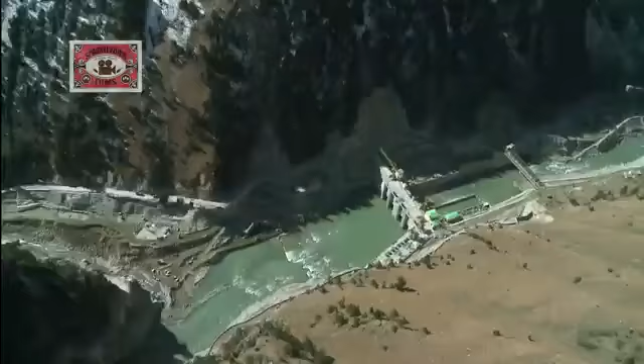There are no half measures in the founder's vision. An approximately $1.5 billion state-of-the-art hydropower project with a capacity to generate 1,000 megawatts. Once completed, it will be the largest hydropower station ever to be constructed by an Indian private company.

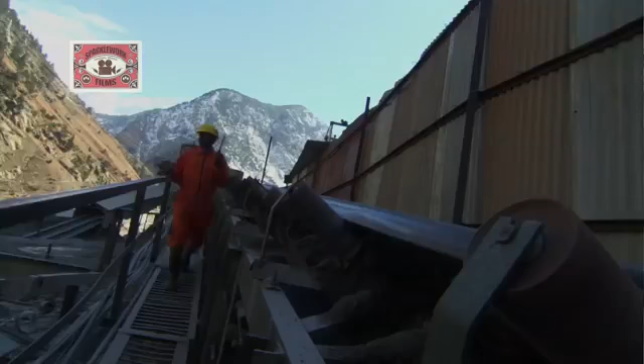When the organization was thinking of implementing the Karcham-Wangtoo project, all of us were determined that let us create an aggressive timeline. So we thought let us keep a time frame of 5 years and then we will work out whether we can better it.

Now, with the clock ticking, it's all about finding the perfect location.

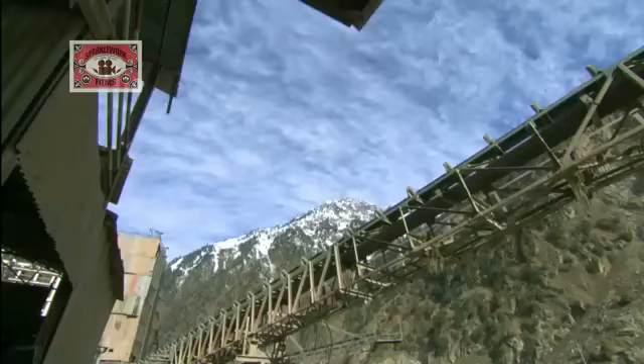At first glance, the tiny hamlets of Karcham and Wangtoo seem an unlikely site to realize an ambitious megastructure vision. Surrounded by jagged peaks, prone to sub-zero winters and accessible only by steep mountain roads.

But when it comes to the science of generating hydropower, this valley is tailor-made. The river Sutlej provides the mass of water. The steep gradient between the proposed dam site and the power plant provides the ideal head.

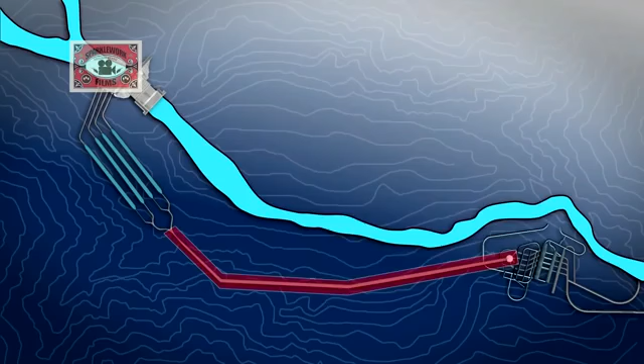The main dam at Karcham will divert a mass of water from the Sutlej into inlet gates. Water will then travel along the nearly 17-kilometer-long head race tunnel, or HRT. From here, it's a steep drop through a height or head into the turbines of Wangtoo's powerhouse.

It is here that the river's kinetic energy will be transformed into electricity. Further onwards, the river Sutlej will flow out through the TRT, or tail race tunnel, back on its original course.

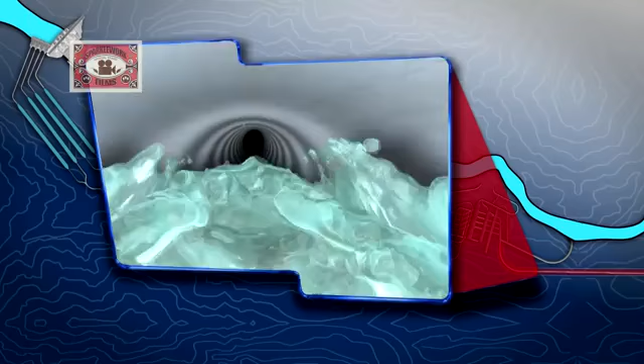With the blueprints in place, it's time to set the works in motion. Strong winds blow across an intimidating landscape, and it's eminently clear setting up this construction site is not for the faint-hearted.

In order to realize this onerous task, the builders commissioned their top commander to set up base camp for the men and the machines needed to build this megastructure. Brigadier Upal brings over 35 years of experience in the Indian Army to the Karcham Wangtoo project. Almost immediately on reaching the site, he knows it's an uphill battle.

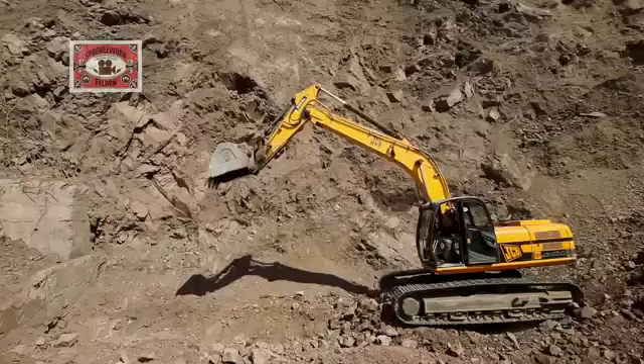In the mountain, it's very rare to find a flat piece of ground. A river flowing and hardly a bank of the river, and the bank was also very low, just running along the riverbed. So to create a camp in a vicinity of this kind, or a terrain of this kind, we had to literally fill up the whole place with a large amount of boulders, stones, rocks, sand to bring up to the height what it is today.

In just over 1 year, the main camp at Sholtu and 7 smaller ones are ready for their occupants, all 14,500 of them.

As the brigadier rallies troops at the high-altitude base camp, in the plains below, other contingents prepare for a treacherous journey.

Besides vital supplies, these trucks will also carry million-dollar equipment as heavy as 50 to 80 tons. All this on some of the most dangerous roads in the mountains.

Keeping steady pace, the trucks ascend to Karcham and Wangtoo. Meanwhile, in the valley below, the task of harnessing the Sutlej begins.

Deep in the gorges of Karcham, excavation for the dam's foundation is scheduled. But before digging can begin, there's a river to divert.

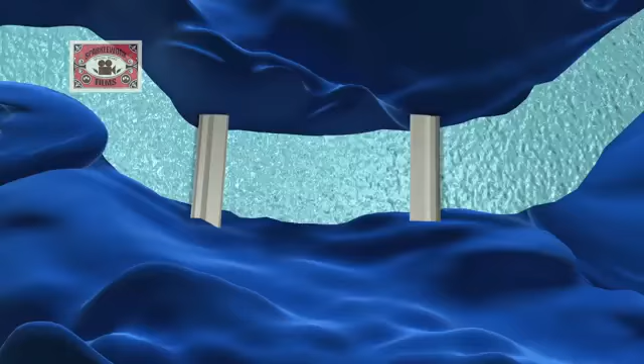The Sutlej must be temporarily diverted through a 541-meter diversion tunnel. Two cofferdams will help maintain the river's new course, preventing water from seeping into the main dam's construction site.

Cofferdams are temporary structures, often made from rockfill, which can get washed away with every monsoon. But with the clock ticking on the project's record-breaking deadline, this dam site requires a sturdier fortress. Designers create a cement-reinforced structure that won't need to be rebuilt after the rains.

With the Sutlej successfully diverted, it's time now to build the dam.

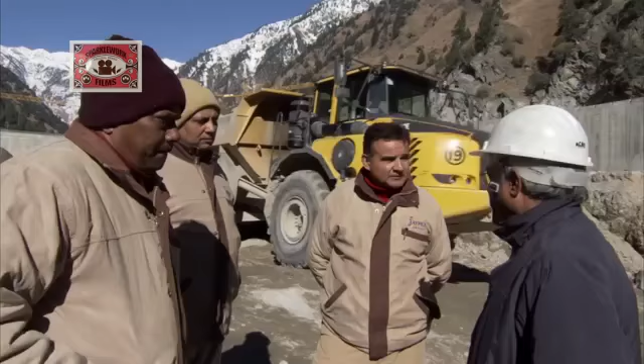At the helm of affairs is Civil Works in charge KK Sood. He spent the better part of his life building hydropower projects across India.

When I started my career about 33 years back, a 100 megawatt project used to take 15 years for completion. And about 10 to 12 years back, a project of magnitude of 300 megawatt used to take about 7 years.

Now, KK Sood's men must ensure that construction on a 1,000 megawatt project is completed in under 5 years.

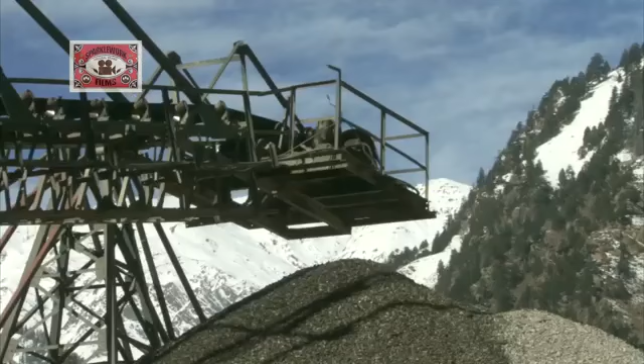But as the team prepares for dam excavation, it realizes that plans set by men are often overlooked by nature. Geological tests reveal startling information about how deep the dam's foundations would need to go.

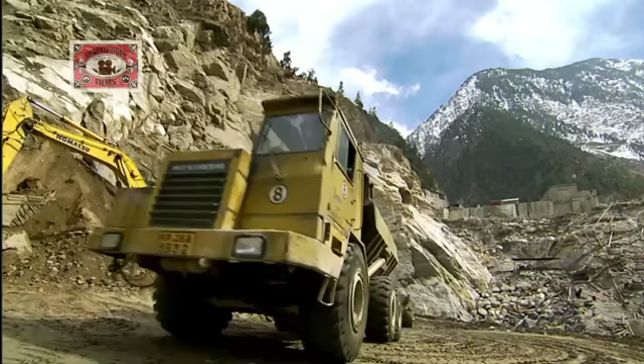Most dam foundations in similar locations go no deeper than 30 to 40 meters below the riverbed. At Karcham, the difference between the riverbed and the dam's deepest foundation level is measured to 53 meters.

Engineers now stare at the prospect of going at least 10 to 15 meters further underground. They are faced with two choices: delay the date of completion and miss the deadline, or make way for the big guns of construction.

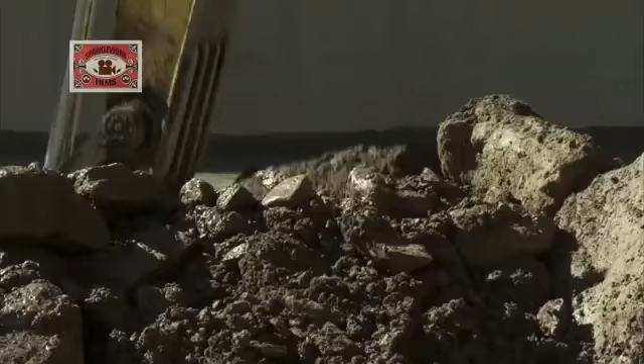Within the stillness of this North Indian landscape, there's frenetic activity underway. The foundations of the main dam at Karcham have reached depths of over 50 meters below the riverbed.

Removing the excavated material is a major challenge, one that conventional dumpers literally can't rise up to. So the builders call in the big guns of construction: six-wheel drive articulated dumpers.

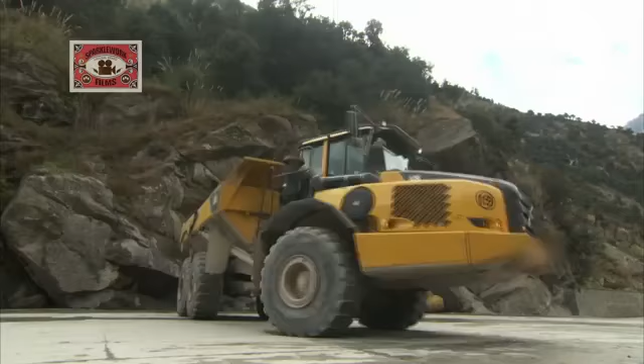Their combination of flexibility with pure muscle allows loads of up to 37 tons to be carried up a height of 1 meter along a length of just 5 meters.

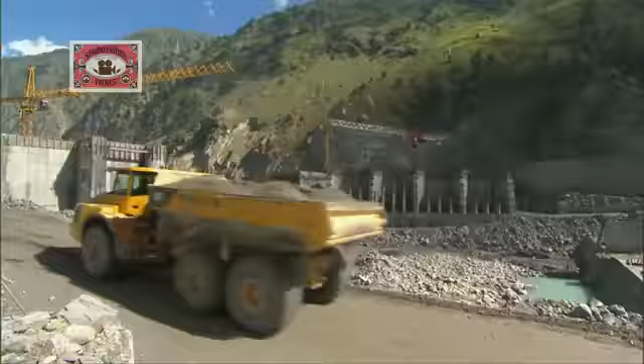While these machines expedite excavation, engineers turn to another pressing concern: securing the cofferdam at depths exceeding 50 meters below the riverbed. The design team takes a bold decision: large-scale cement grouting of the cofferdam's foundation up to depths of an extraordinary 67 meters.

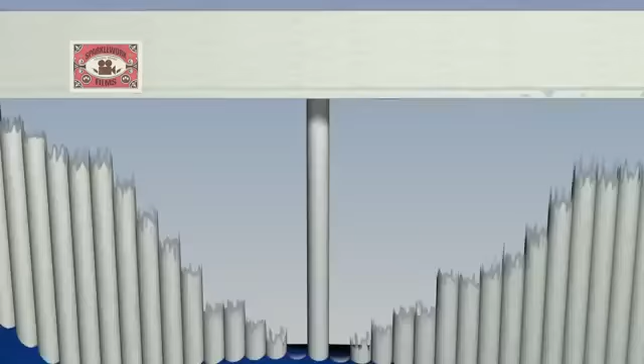We opted for jet grouted columns. This is nothing but an interlocked row of columns of concrete constructed by drilling holes. We lowered a pipe with a nozzle and pumped the cement grout at a high pressure, so there was overlapping of the columns, and a continuous impervious curtain in the riverbed was available.

As one problem is solved, another one quite literally seeps in. Work on the 1,500 megawatt Hydel power project is moving along smoothly when a minor trickle in the cofferdam becomes a deluge.

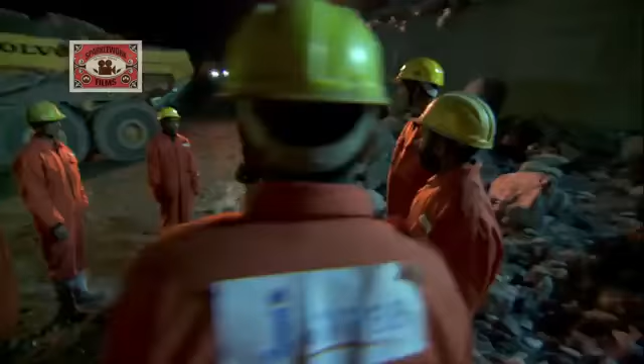The River Sutlej seeps into the main dam site, threatening to undo 2 years of excavation and building. Dam in charge Sanjay Gupta rushes to the site.

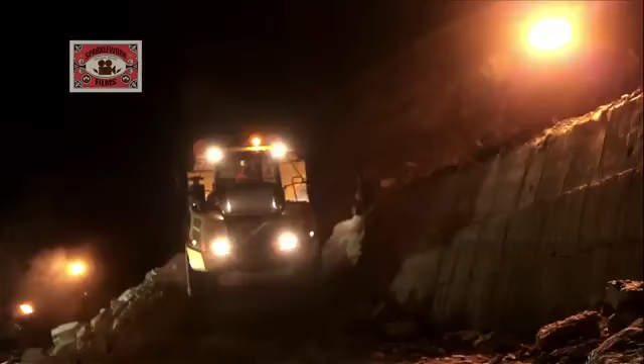That was something different. You can say total satisfaction.

24 hours later, the worst is over. The team has managed to convert a serious roadblock into a badge of honor.

But there are bigger accolades to be earned, ones that will truly render the project a megastructure.

Engineer Ashish Bajaj picks his steps carefully inside the dam's intake sedimentation chambers.

Sedimentation is a process that removes suspended solids from water. This cavernous expanse is the project's crowning glory. Its task, taking on the Sutlej's silt menace. The Sutlej carries large amounts of river sediment in its waters. This spells murder for power turbines, where particles as tiny as 0.2 millimeters can shut down massive Hydel plants.

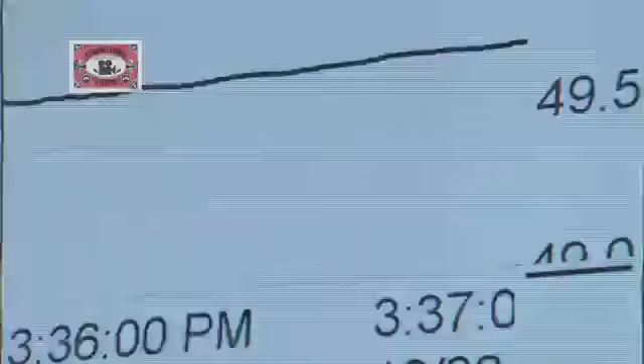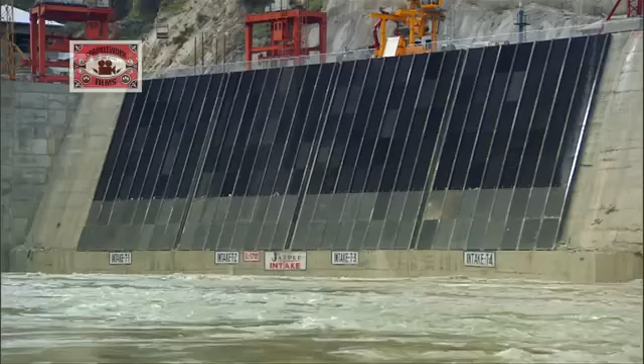To avoid this fate, water is made to enter the tunnel system 15 meters above the riverbed. This ensures that only surface water with reduced sediment flows in. To seal the deal, designers create 4 adjacent sedimentation chambers.

Once the dam is filled, from intake it will be 4.5 meters per second velocity of water that will come in. And in the sedimentation chamber that has been brought down to 0.3 meters per second, so that the water gets stagnant over here. And there are 53 cones, 53 hoppers, through which these particles will get down to the flushing tunnel.

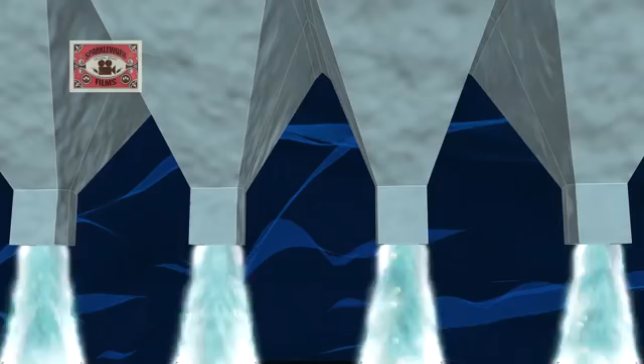Gravity guides silt through these 5.25 kilometer long flushing tunnels back into the river downstream. These are the longest flushing tunnels to be found in the Indian hydropower sector. But the record-breaking streak doesn't end here. These sedimentation chambers have a design discharge of 504 cumecs. That's a whopping 504 cubic meters of water per second.

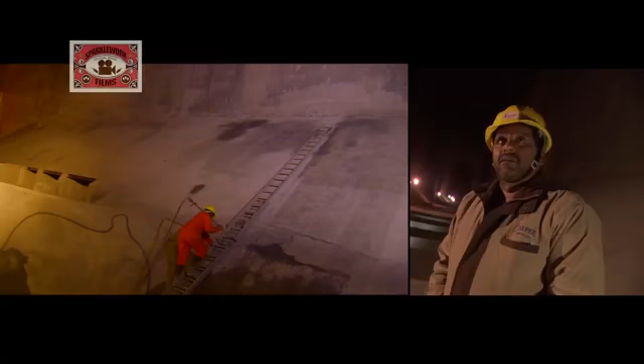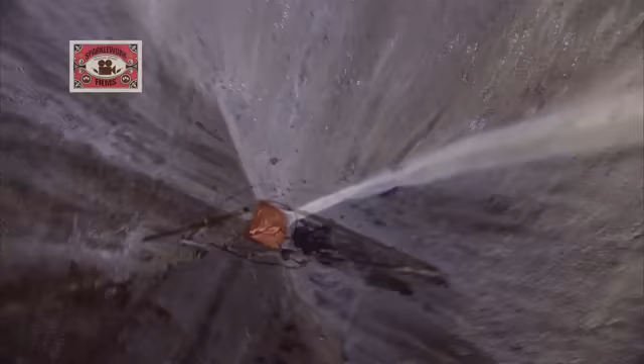This is the world's largest chamber volumetrically, and most probably this will be going into the Guinness Book of World Records. This is 424 meters long with 70 meter transitions. That makes it 494 meters with a 35 meter depth and 18 meters wide, all lined. This whole chamber has been reinforced. This is all RCC lining done over here. With the world's largest sedimentation chambers installed, builders have overcome yet another Himalayan challenge.

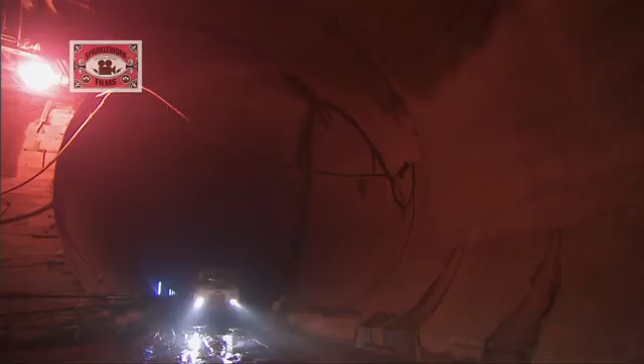As distinct from large storage dams, the Karcham Wangtoo hydroelectric project is a run-of-the-river facility, where the Sutlej is diverted temporarily to run electricity-generating turbines. Then it is restored back to its natural course in the Himalayan gorges. Part of this design involves large-scale tunneling into the mountain. Over 44 kilometers to be precise. Of these, the headrace tunnel is critical to the power equation. It's also the longest.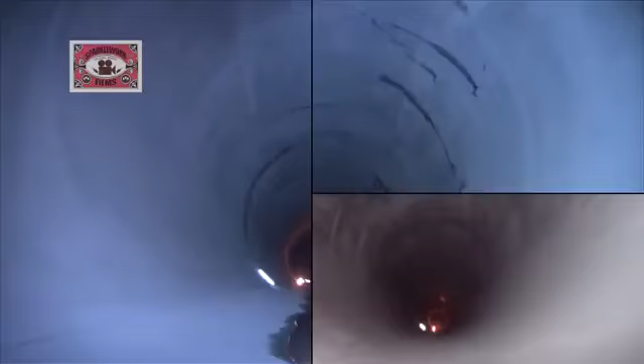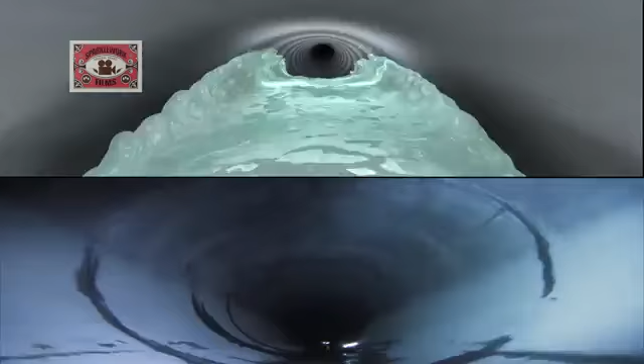The headrace tunnel, or HRT, is 17 kilometers long, running along a downward slope inside the mountain face. Water taken from the intake hurtles at 4.88 meters per second through a cylindrical tunnel of 10.5 meters in diameter. By the time it reaches the head of the tunnel, it gathers enough kinetic energy to power a 1,000 megawatt power station. But before it can do that, there's some heavy-duty boring to be done.

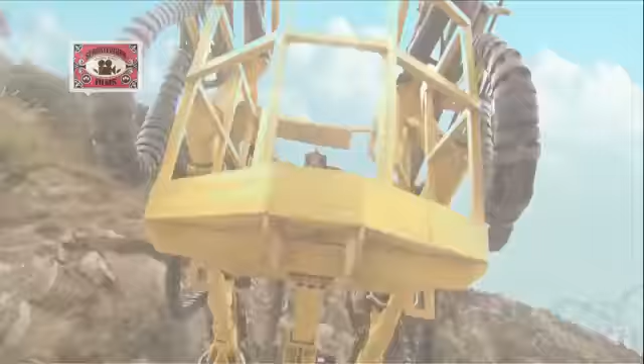This is the muscle for boring through mountains. Called boomers or jumbos, the project has commissioned a whopping 39 machines on site. The process of advancing is, first of all, we drill holes up to a length of 4 meters with the help of drill jumbos. Then we charge it with explosive, and then the entire charge is fired. After every fire, we get an advance of about 3 meters.

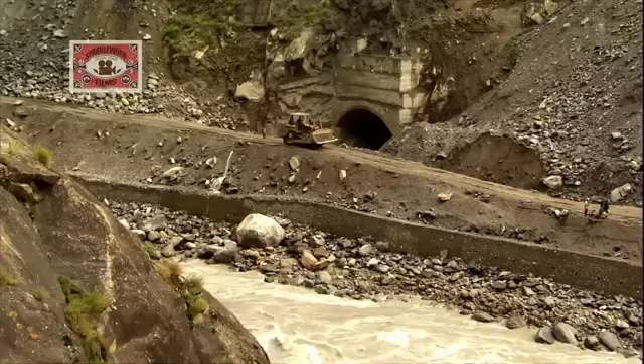For a while, the tunneling team makes good time on advancing along its tunnel path. But things are about to get heated. Soon enough, the builders receive startling information. Workers have run into extremely high temperature zones near one of the approach tunnels or adits. Hot steam is gushing from cracks in the rock face. Extreme humidity and vapors have turned this area into a virtual pressure cooker.

What's going on inside the mountain? The answer will come from an elite group of mining detectives. Builders bring in experts from the Central Institute of Mining and Fuel Research, or CIMFR.

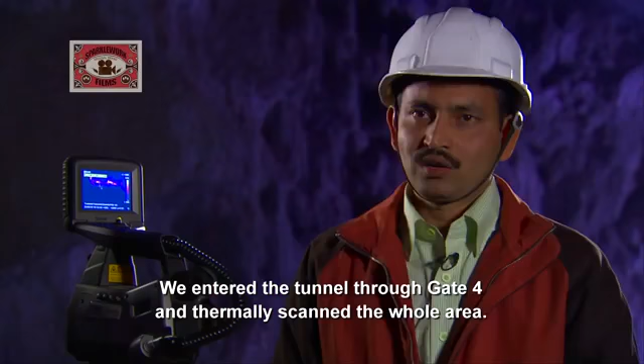Temperature varied between 60 and 98 degrees. Lot of vapors, high temperature.

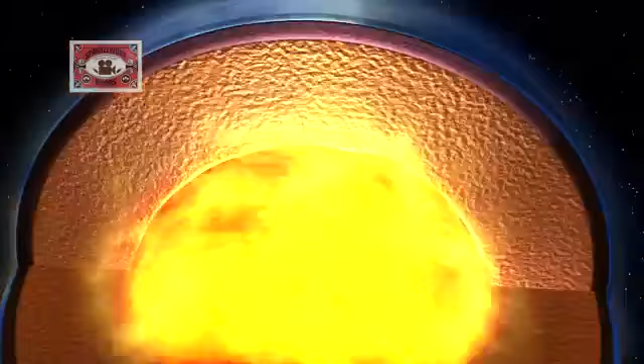Investigators trace these extraordinary circumstances to the Himalayas' fractured geology. We could arrive at a conclusion that it may be magmatic heating. The earth's crust is floating over the very hot magma. So somehow, due to some cracks, this heat is being dissipated. Because it is continuously being released, that means the source has not been exhausted.

Tunneling is immediately halted. Under such high temperatures, there's danger of detonators and explosives blasting prematurely. Timelines set for this ambitious project seem to be going awry.

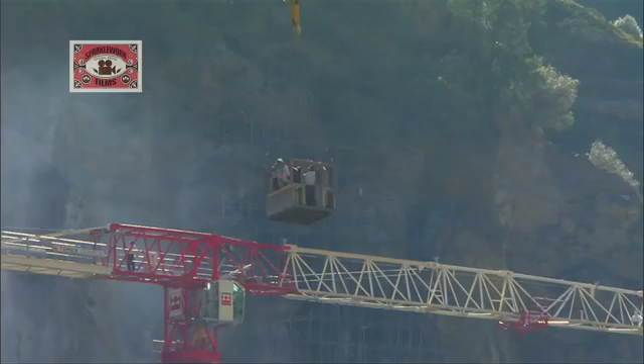Things are getting heated in the Himalayan hamlets of Karcham and Wangtoo. Construction crews at India's largest private hydropower station are facing a pressure situation rarely encountered anywhere in the world: tunneling into mountains has revealed intense hot zones with temperatures as high as 98 degrees Celsius.

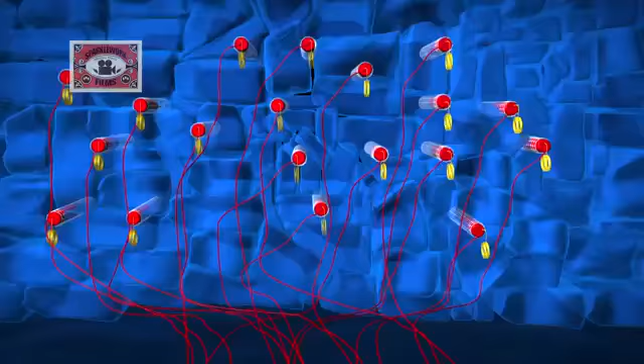The construction team devises a precisely timed operation. They can't afford more than half an hour to clear an area. Workers rush in and spray cold water on the rock face. Detonators are placed 100 meters away from the rock face. Then the blast is set off. Never before have such extreme circumstances been encountered and overcome in India.

Meanwhile, across the valley, other heights are waiting to be conquered. This mountaintop is the site for the Hydel project surge shaft. It poses a unique challenge for project engineer Samrinder Kumar.

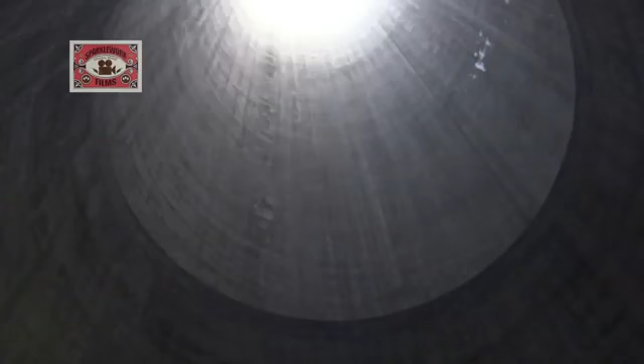Samrinder's team must commence construction on the straw-like shaft that's crucial to ensuring water balance for the entire power station. When water gushes through the head race tunnel, it passes through pressure shafts and drops vertically down into the powerhouse, turning turbines.

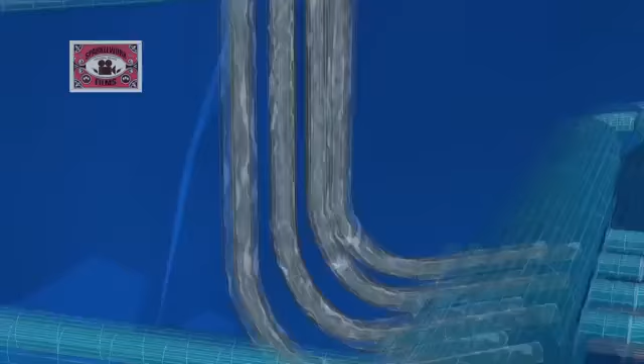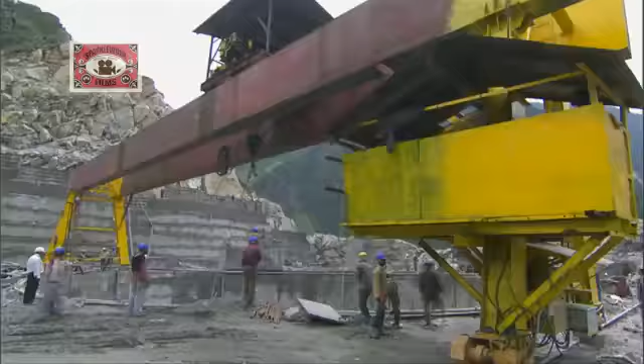Wasting no time, a group of expert climbers is roped in. Scaling the mountain face, they carve out tracks for a pathway. Inch by intrepid inch, they construct a foot ladder made from iron rods.

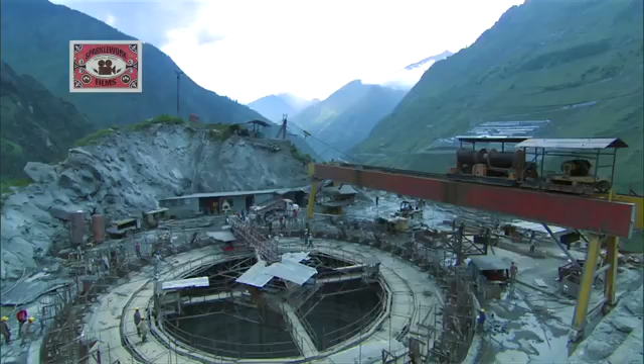Workers climb the 185-meter slope to build the approach road and start work on the surge shaft. Their goal: to complete the approach road without losing a single day of construction. Piece by piece, blueprints imagined by the project's design team are being raised from ground up. Meanwhile, the biggest piece in the power structure is being constructed deep below.

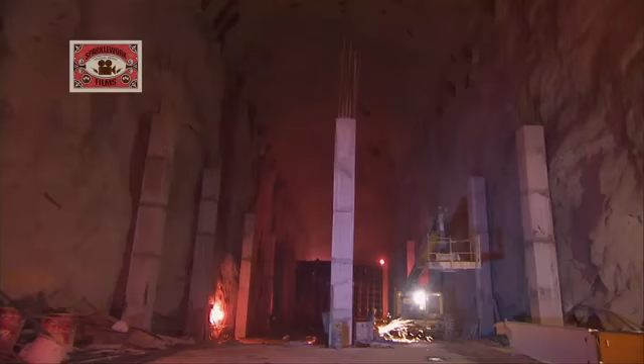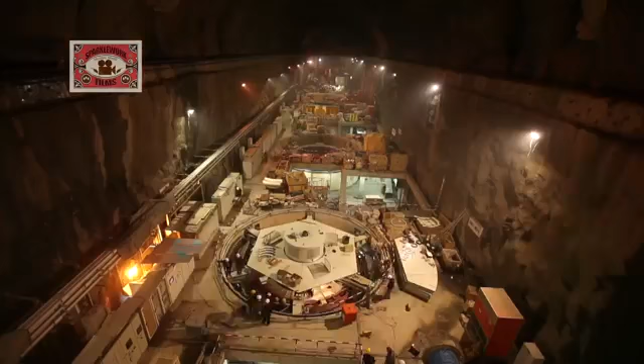Far within the cavernous recesses of Himalayan peaks lies the underground powerhouse of this 1,000 megawatt facility. This is the heart of the Karcham Wangtu project. It's where the gushing might of River Sutlej transforms into electricity. Keeping this heart beating are 4 state-of-the-art turbines, each capable of generating 250 megawatts of electric power.

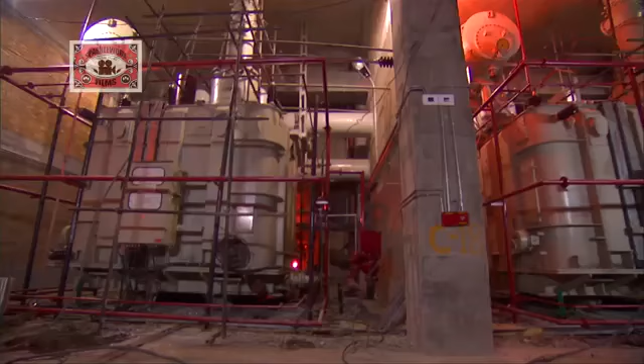Electricity generated in these machines will travel to the transformer hall. Here it will be stepped up, which actually means boosting the voltage of electric current. This stepped-up current will then be evacuated out of the powerhouse through a switchyard into the national electricity grid.

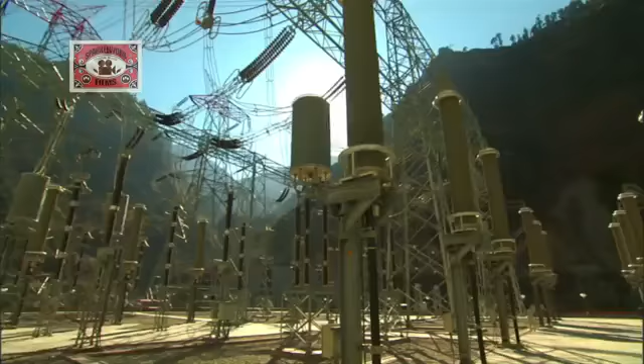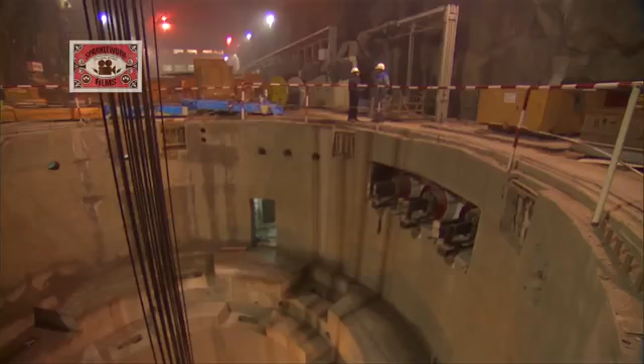At Karcham Wangtu, veteran hydro-energy engineer Kanti Prasad oversees powerhouse construction and its most critical component, the turbines. The total weight in this turbine, in this generating unit, would be more than nearly about 700 metric tons. With the powerhouse turbines yet to be commissioned, Kanti Prasad's most immediate task is lowering its massive components into these hollow chambers. It's heavy lifting that will require heavy infrastructure.

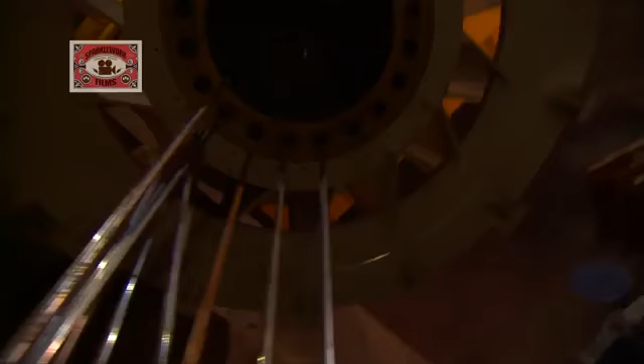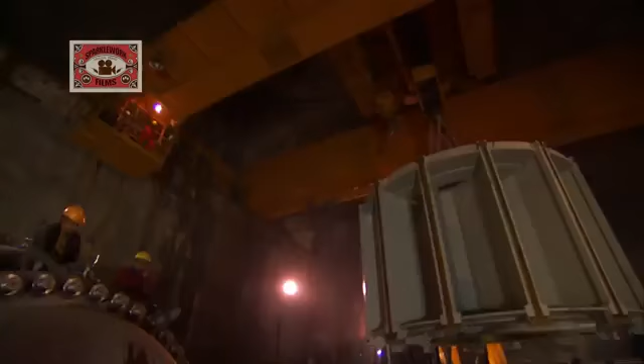This is one of the largest pieces of equipment to be used in the project: the Electric Overhead Travelling, or EOT crane. This mega crane can install loads of up to 275 tons with an astonishing 1 millimeter precision. But it's not just the numbers that are striking. Ingenious designers have used the cavern's natural attributes to create history.

We decided to make a ledge, which has been done for the first time in the Himalayan geology. We have made a mushroom type of structure in the rock itself, and we have created a crane beam right on the ledge. And on that ledge we have laid our rails, and on those rails our EOT crane is operating. This way we were able to get the crane on day 1 when we reached the bottom, and we were able to erect our machinery much earlier.

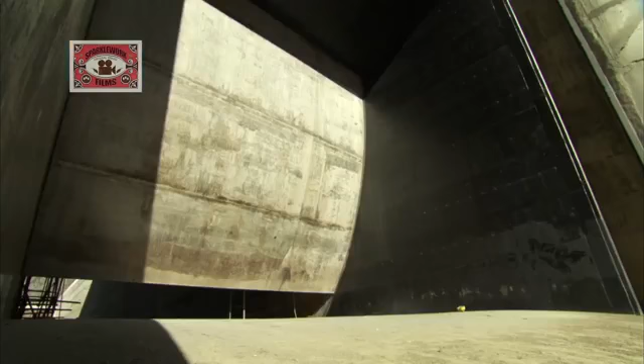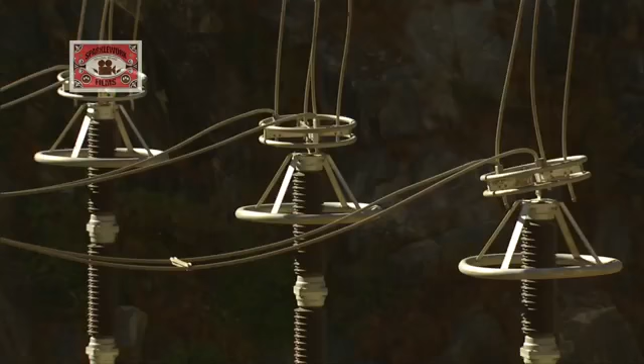At Karcham Wangtu, works for the 1,000 megawatt Hydel project are nearing completion. It's taken just about half a decade to become one of the fastest builds in the history of Indian hydropower projects. Electricity must now fan out across the mountains to reach the energy-hungry populations of India.

This is the final leg in the power journey. It involves setting up 217 kilometers of transmission lines from the peaks of Karcham and Wangtu to Abdullapur in the plains of Haryana.

The higher altitude we are traversing is around 2,450 meters. The difficulty in this area is that we have very steep slopes where the positioning of the tower itself is a problem. So we have to negotiate that slope, cut that slope and lay the tower. Sometimes the slopes are so steep that a single person cannot stand on that point. In my opinion, this transmission line is one of the toughest lines which we are laying in India.

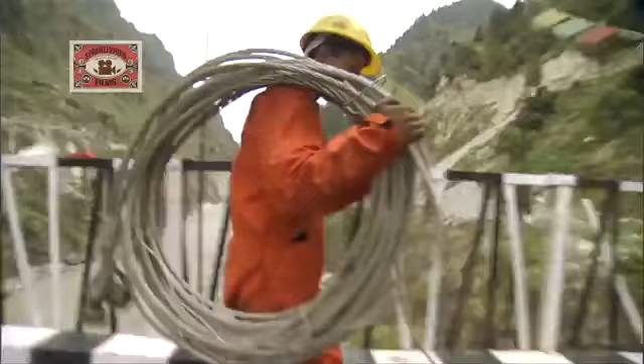In the absence of motorable roads, over 500 transmission towers must be built by hand, with materials and equipment transported manually across the harsh terrain. Collectively hauling the nearly 50 tons required to build one single tower, it's often a steep climb through uncharted territory. But where footpaths end, workers must take to even more dangerous ways to cross the valley.

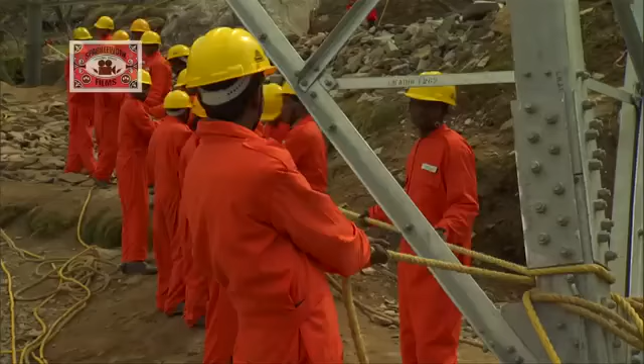This is how workers transport building materials and equipment between two transmission towers, sometimes across distances of over a kilometer long. Once the towers are erected, 400 kilovolt conductors and insulators weighing approximately 30 tons are pulled manually to be strung up on the towers. 7,000 workers have banded together to create a network of transmission towers collectively weighing a massive 25,300 tons.

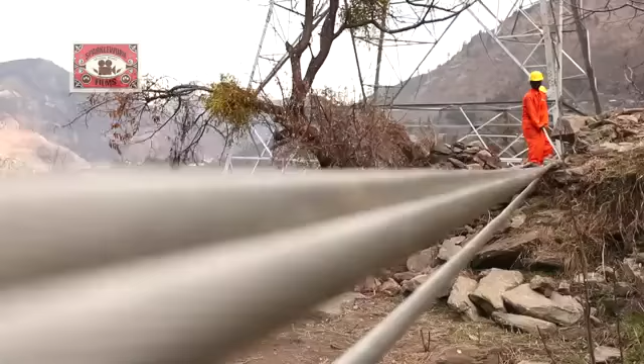The day is not far when the fruits of their labor will be realized in full megastructure glory. Inside the completed powerhouse, it's a very big day. It's time to lower the multi-million-dollar rotor into its turbine chamber.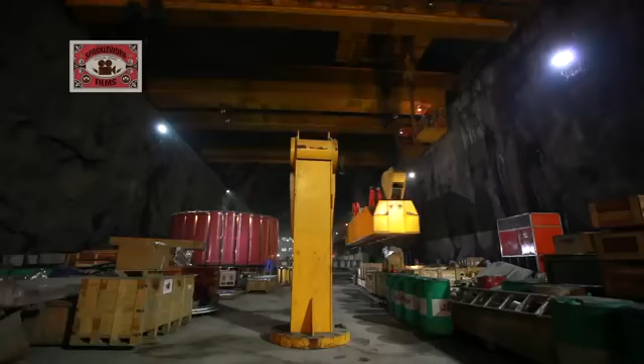475 टन लोड है. High precision EOT cranes take center stage to execute the job.

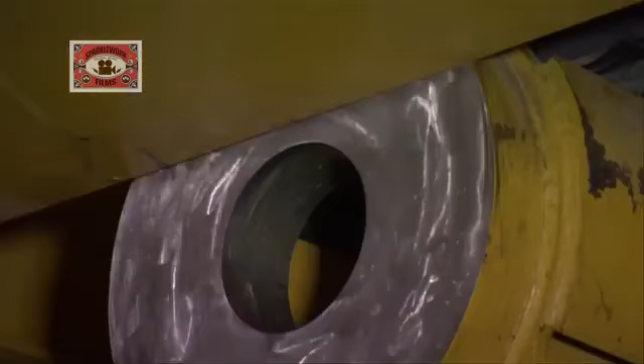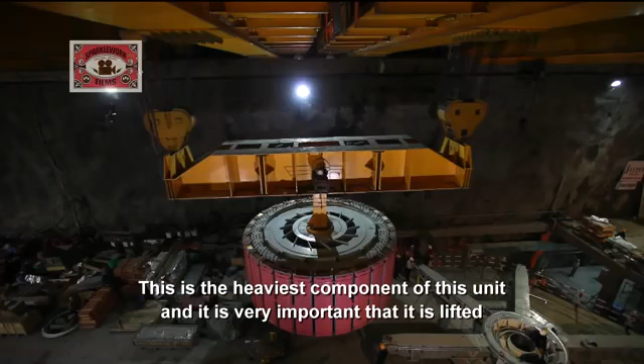All eyes are on the cranes. It's a very precarious operation, with nearly 500 tons of metal and millions of dollars hanging in the balance. This is the heaviest component of this unit, and it is very, very important that it should be lifted and lowered in the pit very, very carefully. Otherwise, a small mistake can play havoc with the machine as well as other components, because the whole load is coming on the cranes. Slowly but surely, the rotor inches closer to its destination.

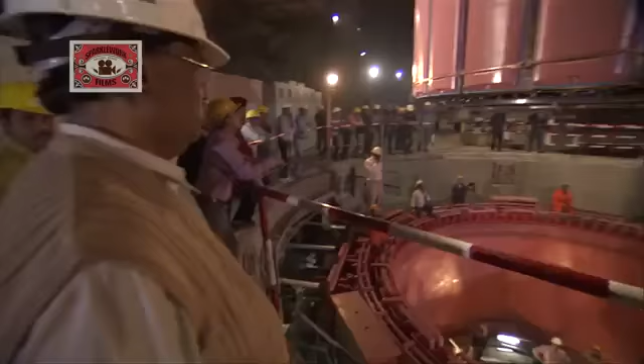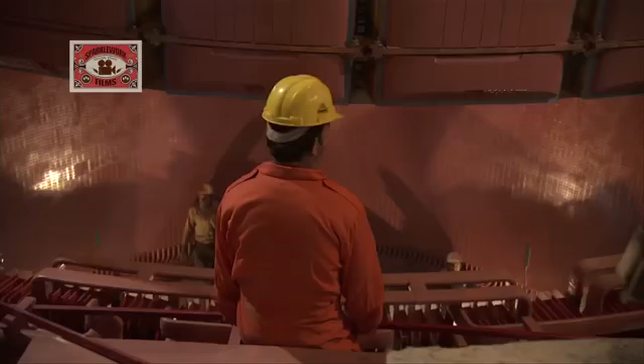On the ground, anxious engineers wait to receive the mammoth component. For the powerhouse team, this is a cliffhanger moment that leaves no room for error. As it lowers, its trajectory is mapped to exact precision. Not a millimeter must be out of sync. It's like a 3-hour movie which you are watching in the theater. Now we have come very close to the commissioning of this unit.

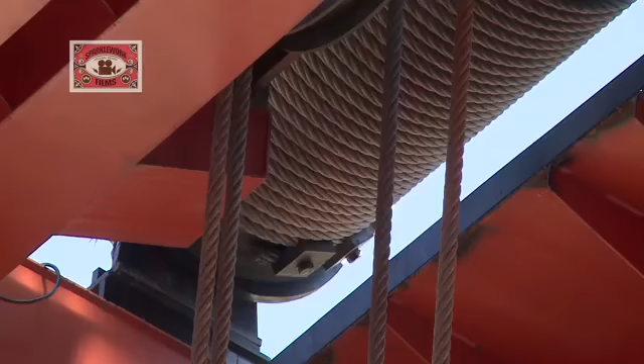Upstream at the main dam site, the gates of the dam are lowered, and the reservoir of the Karcham Wangtu hydroelectric project begins to fill up for the first time. Inside the powerhouse, pre-commissioning checks are at a critical stage. There can be no room for error as the water makes its way across the 17-kilometer head race tunnel to reach the powerhouse's threshold.

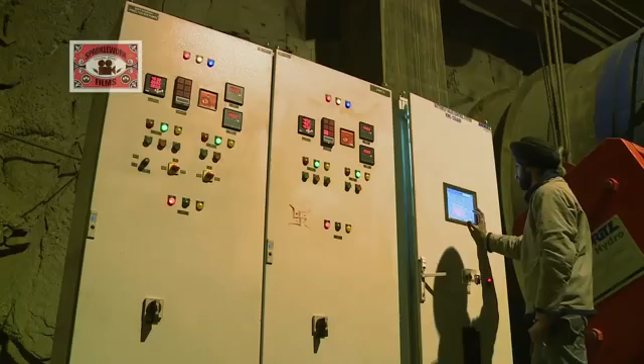For the first time, huge butterfly valves are opened to release water into the pressure shaft. All systems are ready to go. It's time for JP's visionaries to set the wheels of their dream project in motion. It is now on record that in the Indian Five-Year Plan, the Karcham project is the largest project to get commissioned, whether in the private sector or the public sector space.

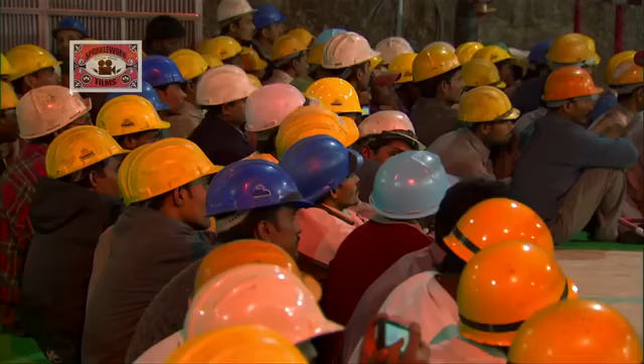The Jaypee Group's founder touches down at the remote Himalayan location to inaugurate his company's latest milestone. Divine blessings are called upon to anoint the cutting-edge facility. The hall crowds with the faces of all those who have worked tirelessly to complete construction in a record time of a little over 5 years. At a specially appointed hour, Jaiprakash Gaur formally commissions the first turbine.

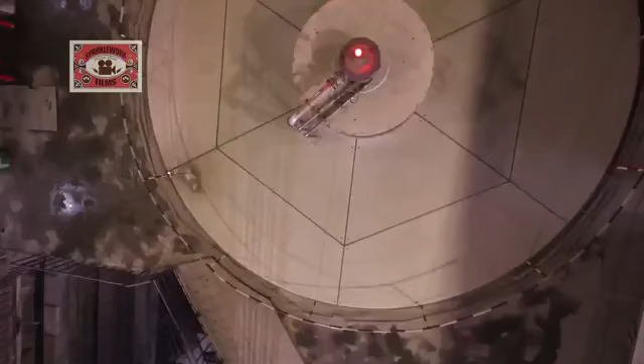The Karcham Wangtu project is one of the group's crowning achievements. I am one of those power engineers who had the privilege of working from 2.5 megawatt to 250 megawatt. So you can imagine my own happiness. With the 4 turbines working to full capacity, the business of powering a nation gets underway. This is only the first chapter in this Himalayan project's megastructure story.